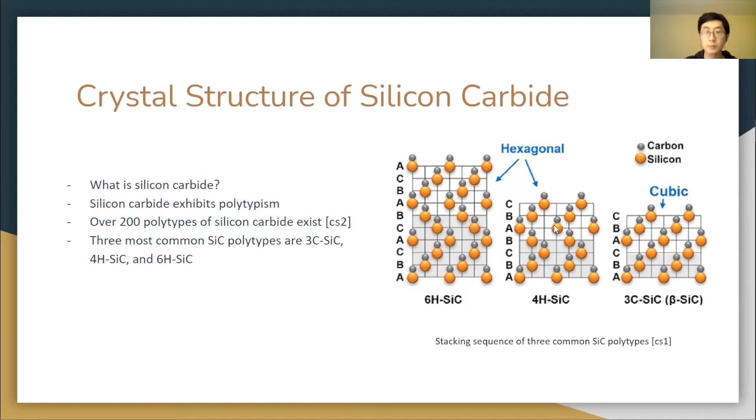How does the polytypism of silicon carbide affect its physical properties? Across all polytypes, mechanical properties are nearly identical. All polytypes, regardless of crystal structure, feature a network of covalently bonded silicon and carbon atoms. These bonds have an extremely high bond energy of 4.6 electron volts, giving rise to silicon carbide's unique thermal and mechanical properties. To list a few, silicon carbide does not melt and instead sublimates at 2830 degrees Celsius, is very chemically stable, and is one of the hardest materials on the planet.

At room temperature, 6H silicon carbide has a Young's modulus of between 380 and 700 gigapascals, depending on the direction of uniaxial loading. Because there is so little polytype dependence on the mechanical properties of silicon carbide, polytype control is generally irrelevant for mechanical applications of silicon carbide.

However, the electrical properties of silicon carbide greatly vary between polytypes. This is a result of polytypes having very differing electronic band structures. For electrical applications, polytype control is crucial. Pure crystals of a specific polytype must be grown so that the silicon carbide has the desired electrical properties.

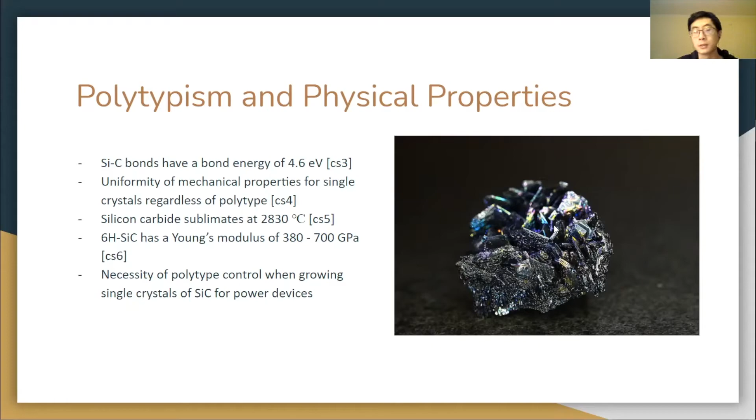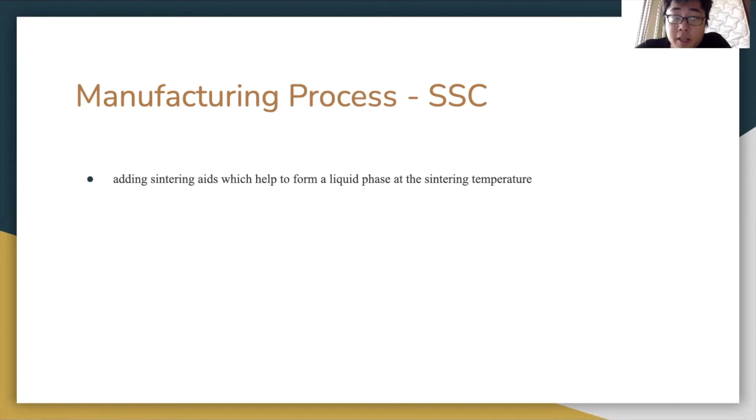And here's SSC, one kind of the three silicon carbide. SSC stands for sintered silicon carbide. It is manufactured by adding sintering aids, which help to form liquid phase at sintering temperature. This allows the grains of silicon carbide to bond together, as shown in the picture. This picture shows one example of SSC.

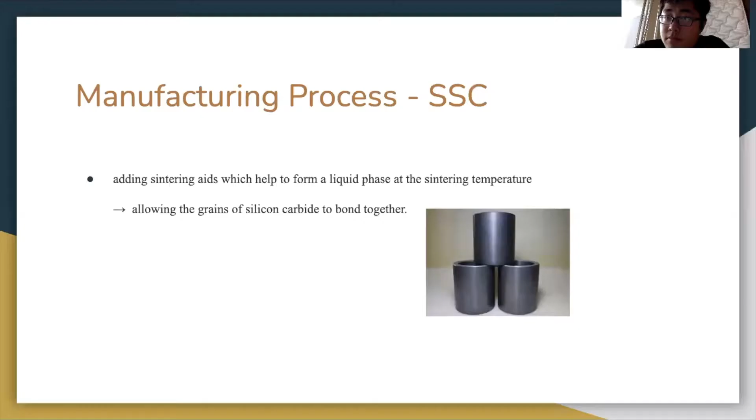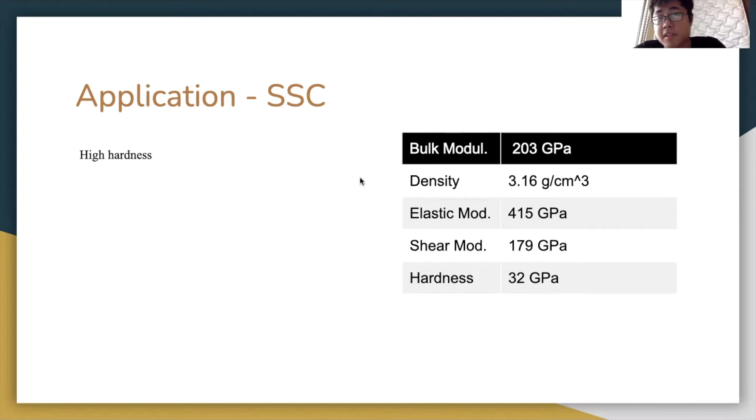And here's the table of SSC properties: density, bulk modulus, elastic modulus, shear modulus, and hardness. As you can see, it has a high hardness, it has a low density compared to other steels, approximately similar to aluminum, and it has a good wear resistance, and it has an excellent corrosion resistance.

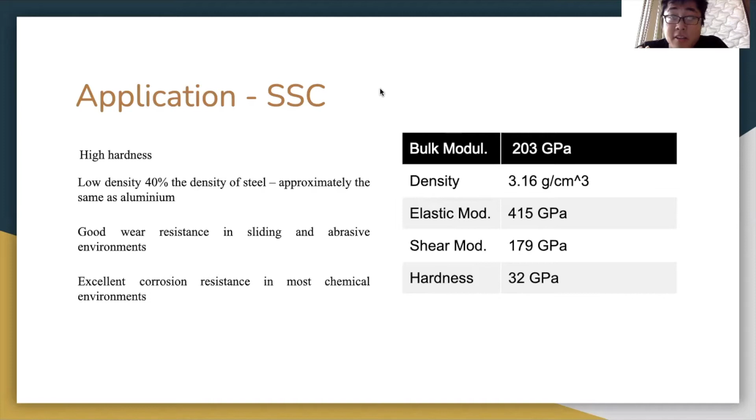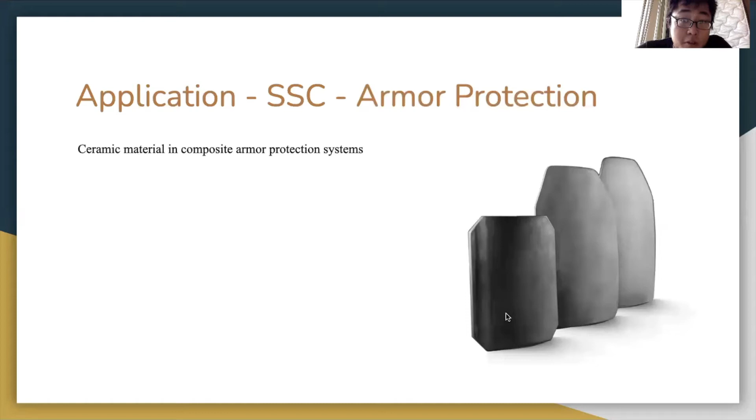So this is pretty good in composite armor protection systems. As you can see, this picture shows one example of the armor system, because of its high hardness, compressive strength, and elastic modulus. And now let's move on to the next part of silicon carbide.

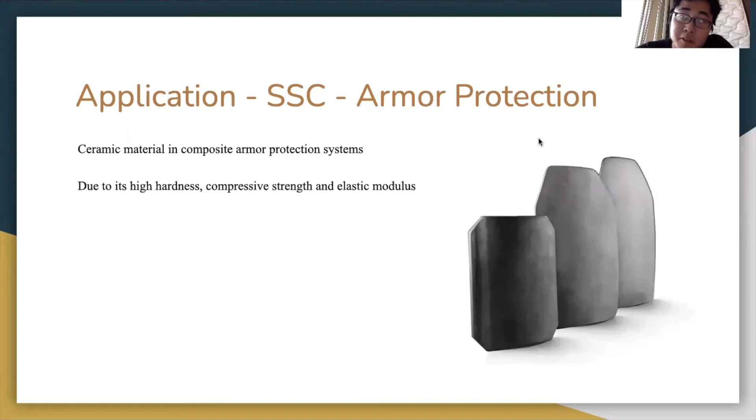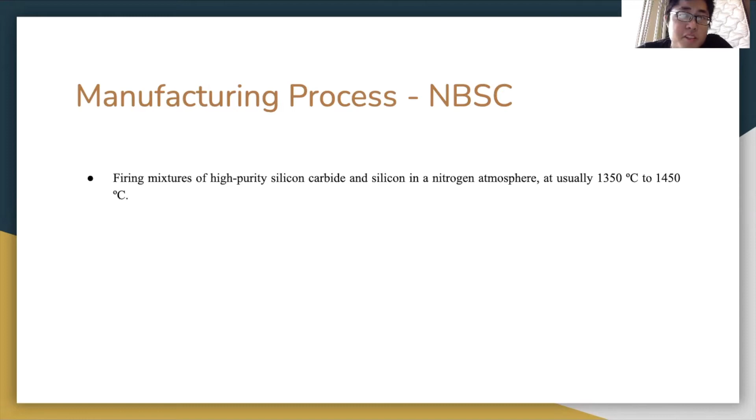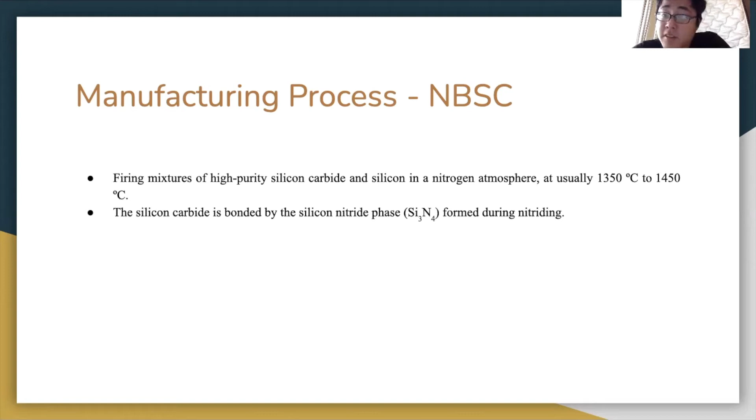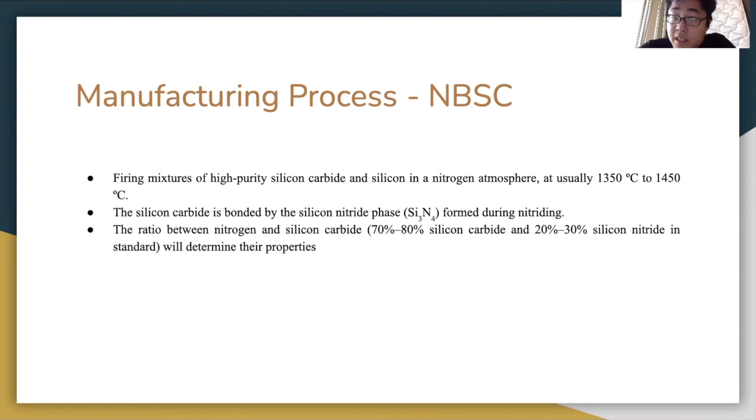NBSC, nitride-bonded silicon carbide. It is produced by firing a mixture of high purity silicon carbide and silicon in nitrogen gas at usually high temperature, about 1400 Celsius degrees. So the silicon carbide is bonded by a silicon nitride phase during this nitriding. As you can see, the ratio between nitrogen and silicon carbide, standardly usually 70% silicon carbide and 30% silicon nitride, will determine their properties.

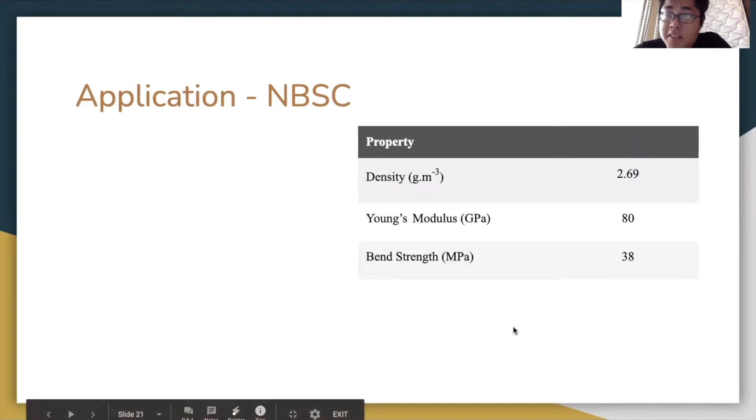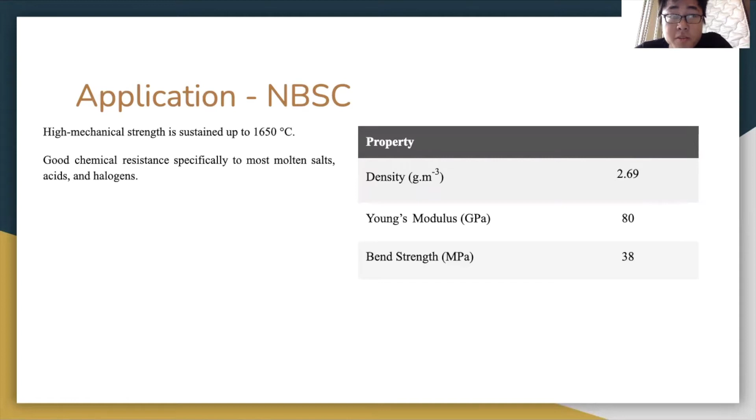Here is a table of NBSC properties: density, Young's modulus, and bend strength. As you can see, it has a high mechanical strength, which can be sustained up to 1650 Celsius degrees, and it has a great chemical resistance against molten salt, acid, and halogens. NBSC also resists wetting through non-ferrous metals, and just like SSC, it has great wear resistance.

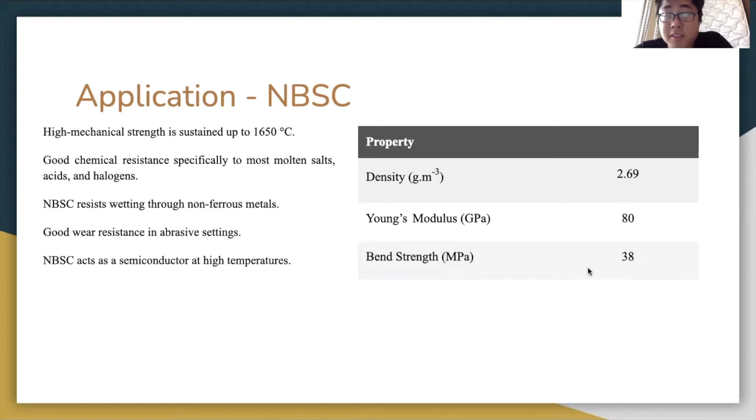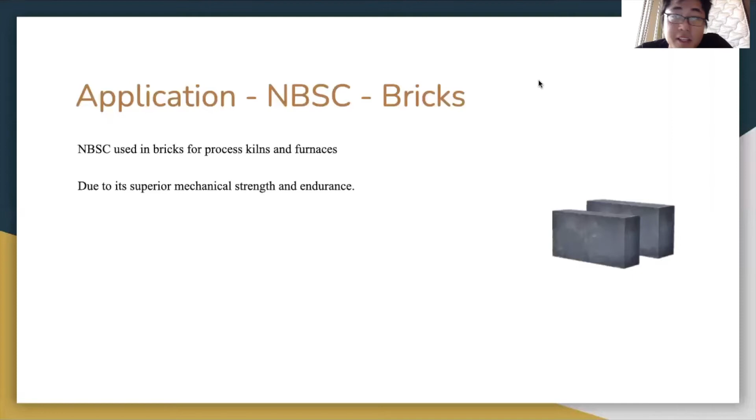And NBSC also can act as a semiconductor at high temperature. Here is a typical application of NBSC. Yes, that is brick. NBSC is used in brick for process kilns and furnaces. That's because of its superior mechanical strength and endurance. And now let's move on to the last but not the least, silicon carbide, RBSC, reaction-bonded silicon carbide.

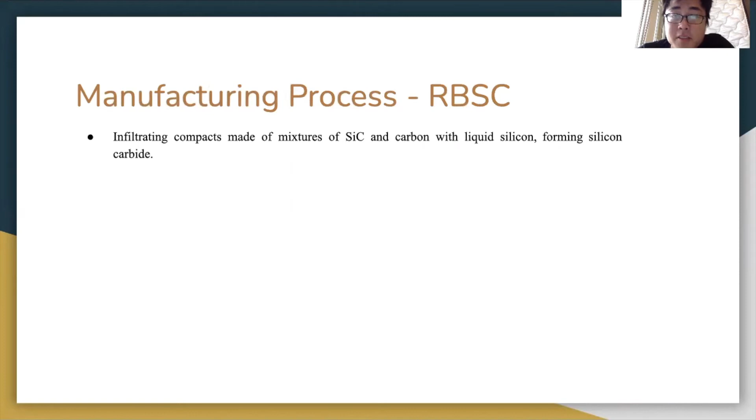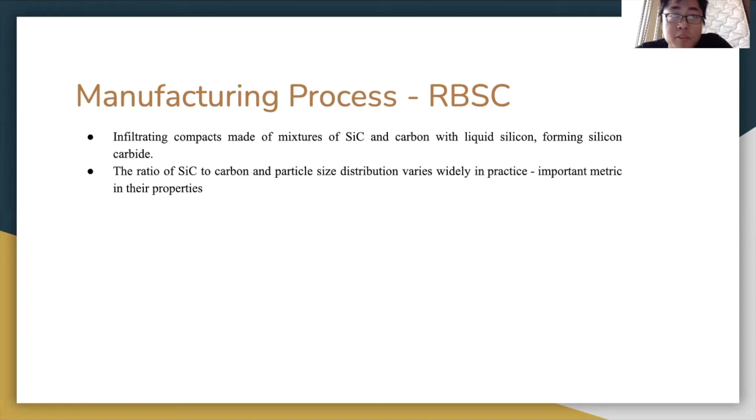It is produced by infiltrating compacts made of mixtures of silicon carbide and carbon with liquid silicon. The ratio of silicon carbide to carbon and their particle distribution matters a lot because they determine the properties.

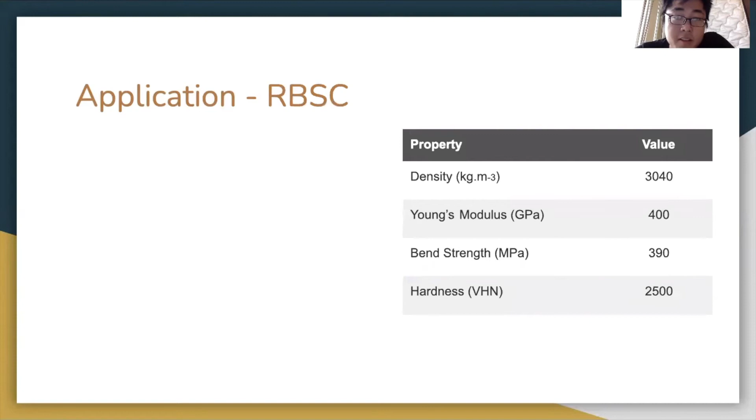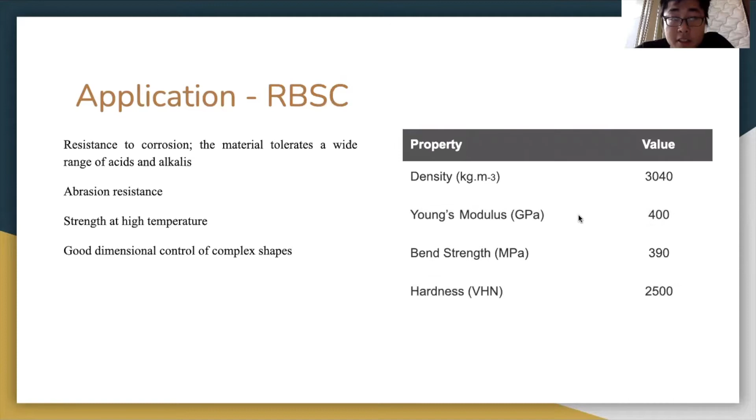Here's the table of RBSC properties: density, Young's modulus, bend strength, and hardness. It has great resistance to corrosion as well as abrasion, high strength at high temperature, and it displays good dimensional control of complex shapes.

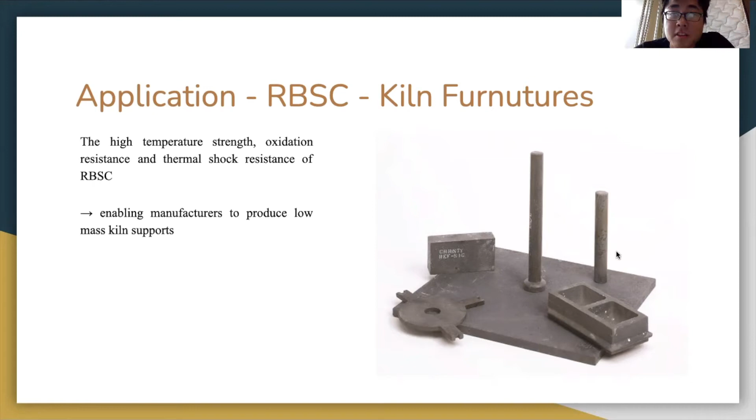Because of its high temperature strength, oxidation resistance, and thermal shock resistance, it is used in kiln furniture. It enables manufacturers to produce low-mass kiln supports.

One of the advantages of silicon carbide as a semiconductor is its relatively high band gap. The critical electric field strength refers to the strength of an applied electric field that results in electrical breakdown, where electric current flows freely through a semiconductor.

This property is important for many power applications and increases with band gap and doping density. Alpha silicon carbide has an 8 times larger critical electric field strength than silicon, the most used semiconductor.

Another benefit of silicon carbide as a semiconductor is its relatively large thermal conductivity of 4.5 watts per centimeter Kelvin at room temperature. Its ability to conduct heat allows it to dissipate power more efficiently and makes silicon carbide a strong candidate for high temperature applications.

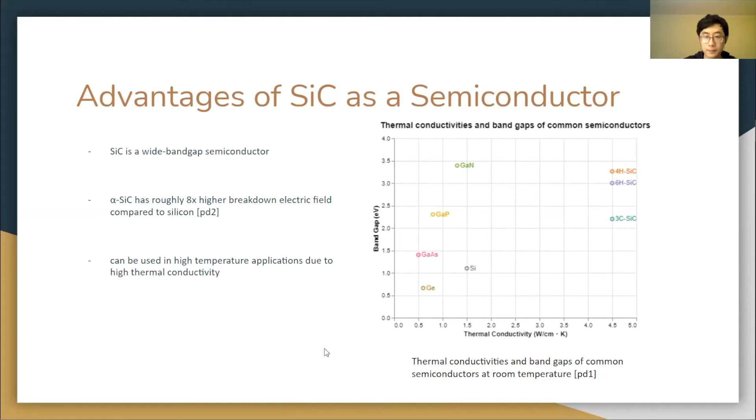In the present day, two of the most common uses for silicon carbide's semiconducting properties are Schottky diodes and MOSFETs. The biggest advantage of using silicon carbide in power switching devices is the minimization of reverse leakage as a result of silicon carbide's high bandgap energy.

Compared to silicon Schottky diodes, which have high reverse leakage currents and are accordingly restricted to low voltage applications, the low reverse leakage of silicon carbide Schottky diodes enables it to be used in high voltage applications.

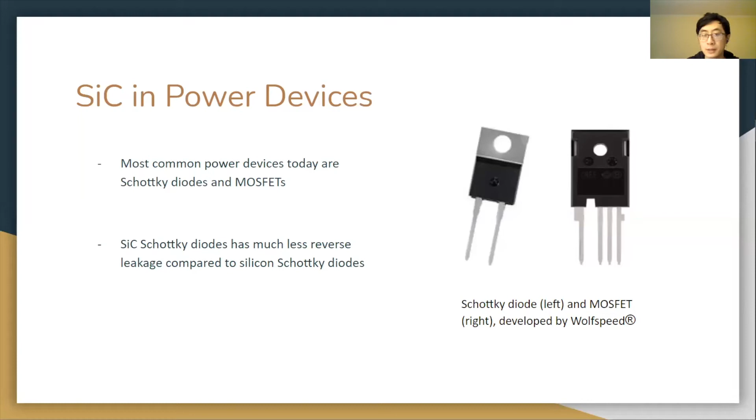I would like to continue the discussion of the applications of silicon carbide in other various industries and facets. But what I want to bring to light is the use of silicon carbide as a means to synthesize diamonds. The conventional way of making synthetic diamonds usually has high costs for relatively low yields, with high expenditures usually coming from creating a high pressure environment and plasma activation.

However, silicon carbide provides a more lucrative alternative to subvert that. The environment used to create synthetic diamond using silicon carbide does not exceed temperatures over 1,000 degrees Celsius and is performed at ambient pressures.

As with the nature of silicon carbide, being capable of both hexagonal and cubic structure, this method is able to create both hexagonal and cubic structured diamonds.

Not to mention, the diamonds created using this method have very similar properties to those found in the natural world, with an identical, or tested identical, Vickers hardness of 50 gigapascals and a near similar Young's modulus value.

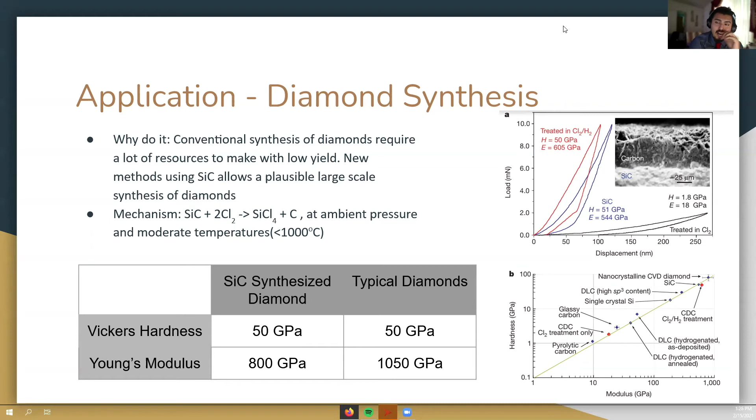The chlorine gas itself is a mixture of both chlorine gas and hydrogen gas, with a 2-to-1 ratio of chlorine gas to hydrogen gas. The higher ratio of that typically yields greater diamond synthesis yield, but the hydrogen gas is there to motivate the reaction forward and not have it fall back.

Another application I would like to mention is the use of silicon carbide as an abrasive, or more specifically as a brake. Silicon carbide has various properties that would lend itself to be a great candidate, one of which being its lightweight property, comparative to its metal alloy counterparts, to say something like an iron alloy brake.

A silicon carbide composite brake only requires a percentage of it to be made of silicon carbide, while the rest can be made of something equally lightweight, like carbon fiber reinforcement.

Another aspect would be its resistance to corrosion. Since it's a ceramic, it's far more resistant to corrosion than its metal alloy counterparts. But I believe its most defining feature as a good candidate for a brake is its capability of withstanding high temperatures. As mentioned earlier, it's used as furnace insulation.

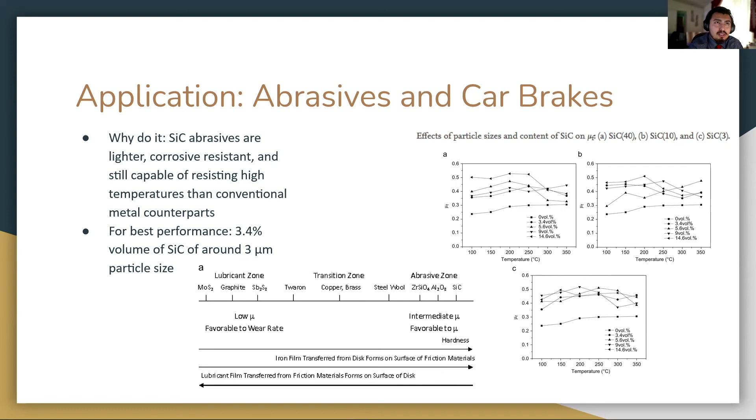Even at high temperatures, the silicon carbide composite brake is able to maintain a consistent friction factor. One place we will see silicon carbide in the near future is in jet engines.

In the proposed aerospace planes of the future that will fly between Earth's atmosphere and space, these sections will need to withstand more than 2000 degrees Celsius. As a result, they need to be made of extremely durable materials, and silicon carbide is the primary candidate.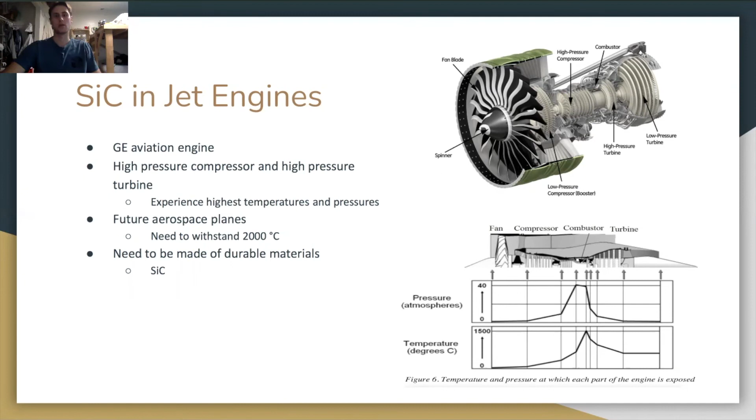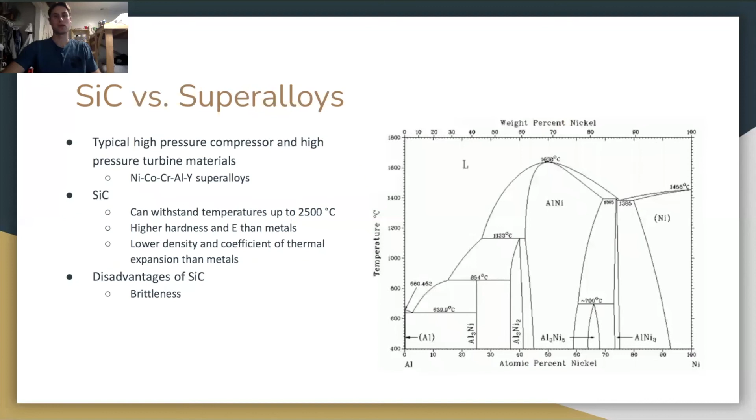However, silicon carbide also has a few disadvantages compared to superalloys, the primary one being its brittleness. In order to quantify this brittleness, I'll briefly explain the concept of fracture toughness. Microscopic cracks exist at the surface and inside of material. When stress is applied, it gets amplified at the tips of these cracks.

Metals, which include superalloys, fail through ductile fracture, in which plastic deformation occurs at the crack tip when the stress there exceeds yield strength. Therefore, there is extensive energy dissipation, and crack length only increases with an increase in stress.

When a stress acts on a crack perpendicular to its length, the fracture toughness, or K1C, is equal to Y times sigma times the square root of pi a. It has units of megapascal square root meters, and a lower K1C means that a material will fracture under a lower applied stress. The fracture toughness of silicon carbide is 2 to 4 megapascal square root meters, which is very low.

To avoid fracture in jet engine parts, they're instead made from silicon carbide ceramic matrix composites, which I will refer to as SiC CMCs.

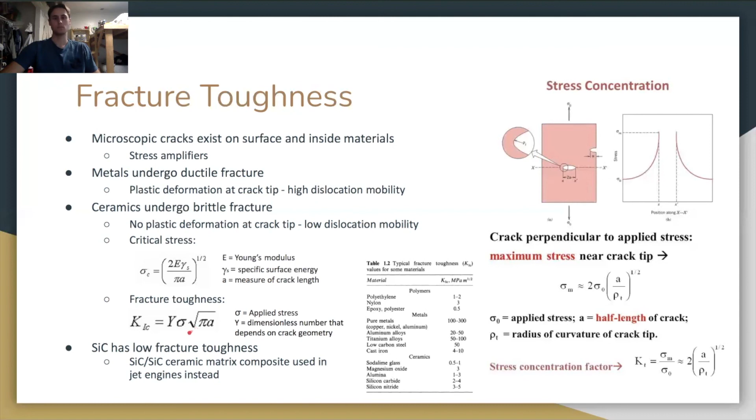I'll give a brief overview of what a ceramic matrix composite is. A composite material consists of a chemically or physically distinct phase distributed within a continuous phase, which is called the matrix.

In a SiC CMC, the distributed phase is silicon carbide fibers. Fibers of a given material have a large aspect ratio, or length to diameter ratio, which gives them more flexibility and higher strength than the bulk material of the same composition.

The primary role of these fibers is to impede crack propagation in the matrix by introducing mechanisms that can absorb energy, similar to plastic deformation in metals. These mechanisms include debonding of the fiber matrix interface and bridging of cracks in the matrix.

The most common silicon carbide CMC is composed of beta silicon carbide fibers with diameters between 8 and 15 micrometers, embedded in a silicon carbide matrix, which can be any of its numerous crystal structures.

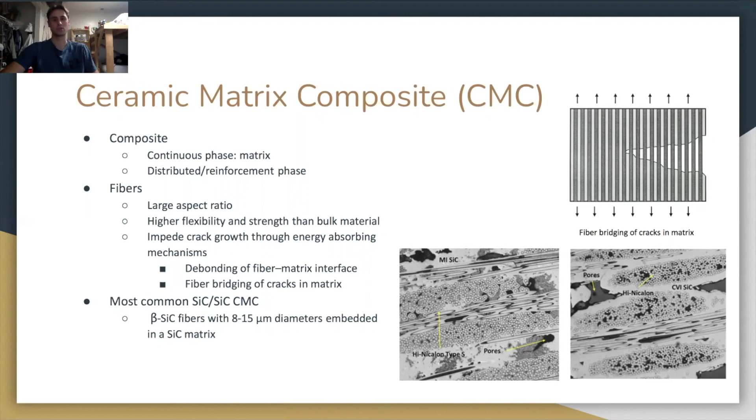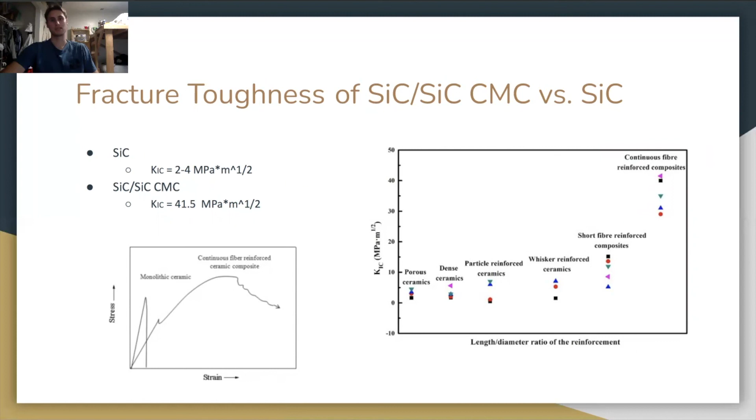We saw earlier that the fracture toughness K1C of monolithic silicon carbide is 2 to 4 megapascal square root meters. The fracture toughness of SiC CMC is 41.5, roughly 10 times greater. This is why we will be seeing SiC CMCs in future jet engines, since they are relatively resistant to fracture in addition to being able to withstand high temperatures.